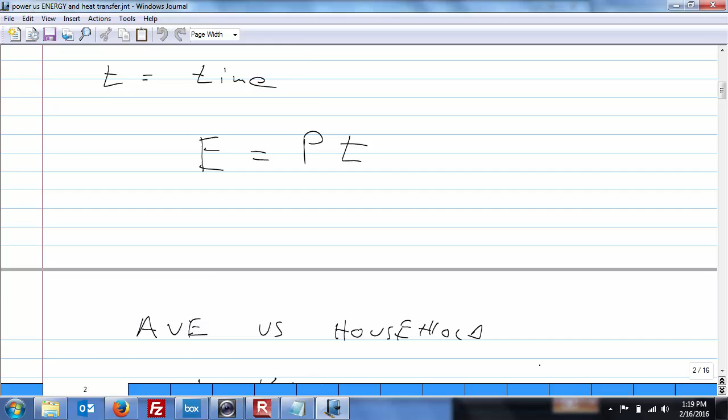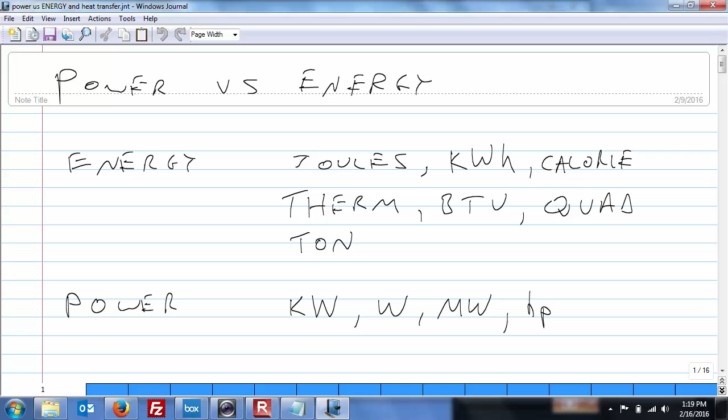Okay. So last time we covered the difference between power and energy. We talked about the different units that energy is measured in and the different units that power is measured in. This is your equation for the relationship between energy, time, and power. We did a little example problem. I showed you whenever you're doing an engineering technology problem, you're always solving 3 problems at once. You're taking care of the numbers, the powers of 10, as well as the units.

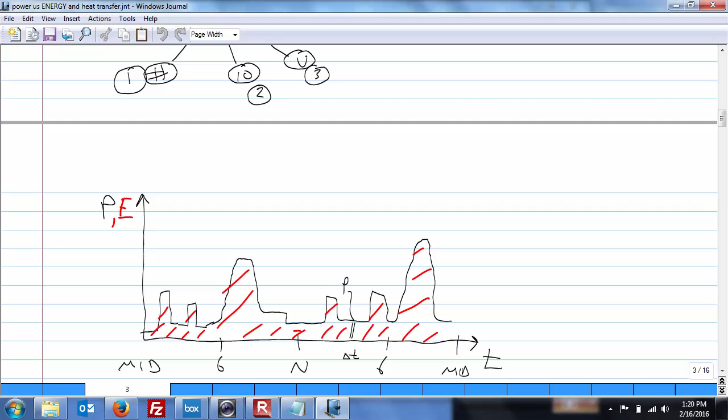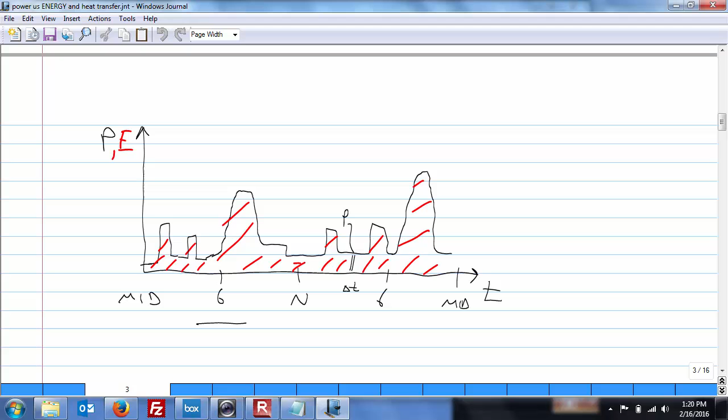We said that an average American house consumes about 1 kilowatt of electricity on a continuous basis, and that ends up being 24 kilowatt hours per day. I think we then converted that into dollars too, and said how much thermal energy is in your house at a given time. And I tried to give you a pretty good graphic on the relationship between power and energy, where the power is that little black curve, and energy is all the red stuff underneath. It's basically the integral under that curve, or the summation of all of that under the curve.

I showed you the 3 laws of thermodynamics, and basically what we're going to cover today is just another version of this first law, that you cannot create or destroy energy, and we're just going to do it from a thermal fluids standpoint. So we're going to dig down into one specific example of the conservation of energy. I also shared with you a really important concept. This is typically taught in sophomore year engineering courses, and it's how engineers are taught to think about power. I showed you that there's always an across variable and a through variable. You multiply the 2 together.

In the case of mechanical systems, the across variable is either force or torque. So whether you're pushing something or spinning something, the through variable is velocity or angular velocity, how fast it's moving through space or how fast it's spinning. For electrical circuits, the across variable, as you might imagine, is the voltage, and the through variable is current. Getting into fluids, we talked about power as being a function of how much pressure you have, which is a lot like voltage, and how quickly the mass is flowing through something. We'll see that in more detail in Bernoulli's equation, which I'm going to cover today. So this is just fluid power.

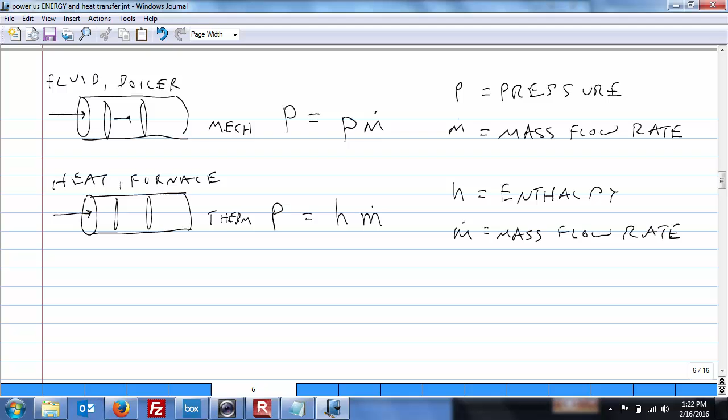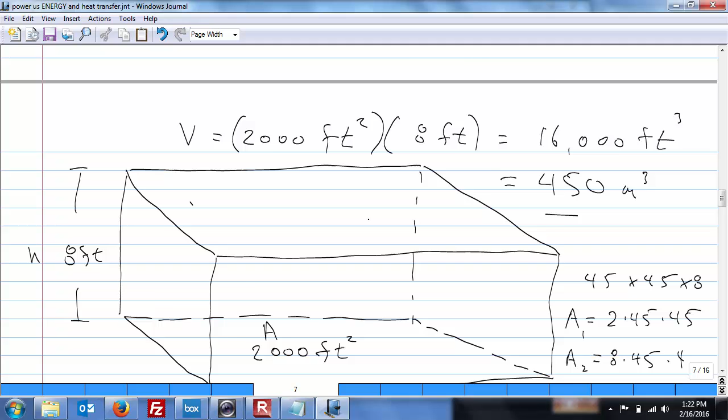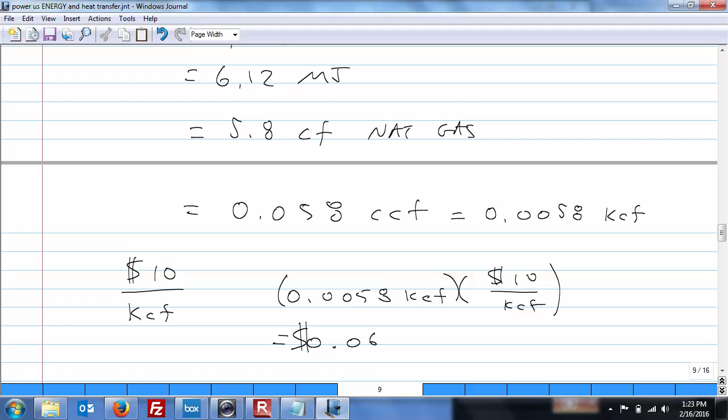Same thing if any of you are taking any of those heavy equipment courses. Same difference in your hydraulics. Right, so you just squish one place and the fluid comes out somewhere else. And then for a thermal system, we talked about enthalpy. So that's how much heat per unit mass is in your fluid, and then how quickly that fluid's flowing through there. So we're going to talk about that a little bit more today too. We did an example calculating how much thermal energy is in a house. I think we came up with 6 cents or so. We converted megajoules to cubic feet, cubic feet to 1,000 cubic feet, and came up with 6 cents of heat in your house.

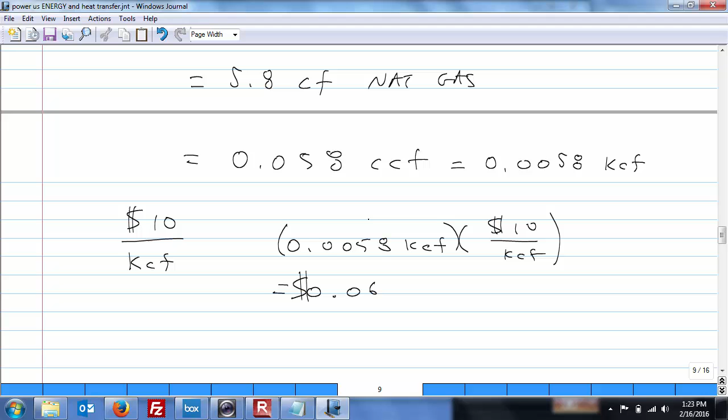We're also going to touch a little bit today on air changes per hour. Later in the course, when we do our blower door test, it's going to be critical that we determine how many times that air comes in and out of the house, or air changes per hour is another way to think of it. So if all of that hot air leaves your house every hour, you're paying 6 cents an hour. We also learned last week that it's not just convection. So for example, if I open the windows right now and let all the hot air in the room escape, that would be the heat convecting out of the room. We also learned that there's always conduction taking place as well as radiation. So this is just one chunk of that puzzle.

We talked a little bit about conduction, phonons. I love thinking about this, just molecules vibrating. And in fact, today we'll talk a little bit about the definition of temperature when we do fluids. Convection, that's just molecules moving, and then radiation, that's photon transfer.

Another thing on this, and this is critical for your building energy efficiency, is to realize that different materials are transparent to different wavelengths. In our everyday life, our eyes just respond to photons that have a wavelength between 400 and 700 nanometers. That's light. The electromagnetic spectrum doesn't end. There's stuff as long or as short as you want it.

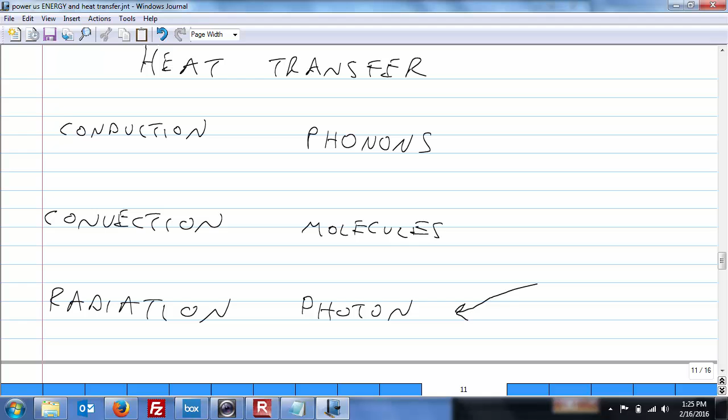In the case of windows, light photons come through the window, but the heat photons in the room typically don't go out. That's more or less the greenhouse. That's why greenhouses work the way they do. And it's also kind of our own greenhouse effect.

So that's radiation. We then went through a heat transfer coefficient, and I mentioned that this right here is just thermal power. It's also listed as Q. K is our heat transfer coefficient. A is the area. Delta T is the change in temperature.

If you remember last time, we spent a lot of time discussing the fact that a change in temperature in Kelvin is the same as a change in temperature in Celsius, because a Celsius degree and a Kelvin degree have the same size. The absolute scales are shifted by 273, but the delta T doesn't matter. And then S, this is how thick the wall is.

So we determined that if a material, do you guys remember what this is? Was that concrete, or might have been concrete? Yeah, it was either concrete or steel, but every material has its own K value. We also talked about the difference between the K value and the R value. The R value depends on how much you have, but the K value depends on what material you're talking about.

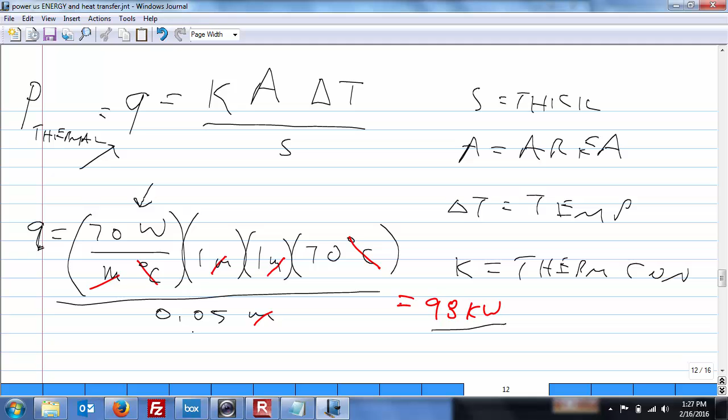Multiply the K value times the area by the delta T, look at how thick it is, and we determined that through that chunk of building, this is probably a boiler. The thing's probably pretty hot. Normally you don't have a 70-degree Celsius differential between indoors and outdoors. And 98 kilowatts of heat flowing through 1 meter squared, like out one window, is a lot. Way more than you get in a normal building. But the same mathematics applies.

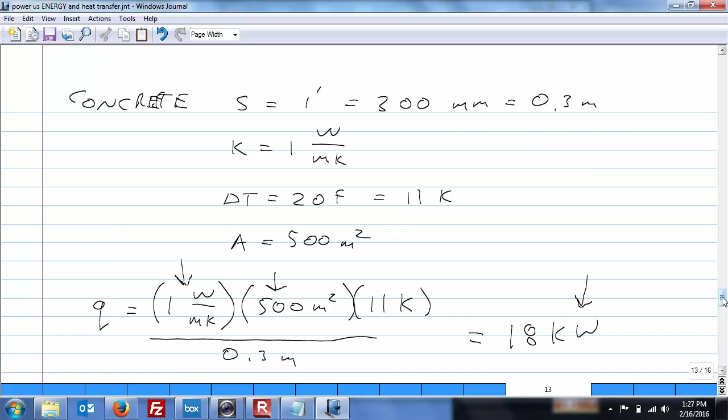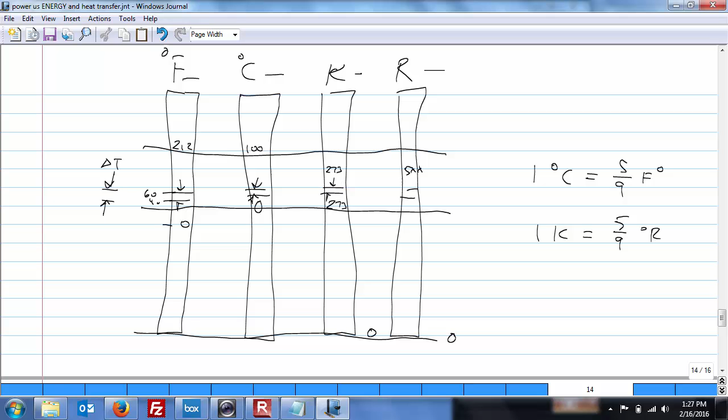So we did it again for concrete. That first one was steel, this was concrete, much lower thermal transfer coefficient, larger area, and therefore a smaller thermal loss. And there's where we looked at the relative scales of Fahrenheit, Celsius, Kelvin, and then Rankine. You don't hear that very frequently for temperature, but Rankine is the Fahrenheit equivalent to Kelvin. The degrees are just smaller.

Okay, then we went through enthalpy, which is just heat density. I mentioned the fact that little h is the intensive variable, so hopefully you took a little bit of time to look up the difference between an intensive and an extensive variable. Intensive is just how intense the energy is inside a given chunk of matter. So it's measured in kilojoules per kilogram, or energy per unit mass.

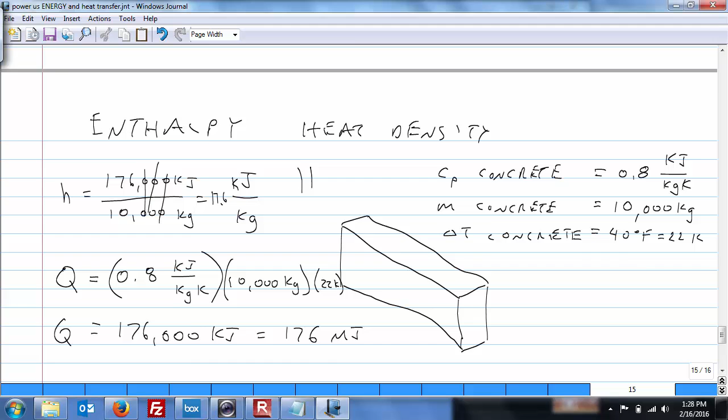And then big H is also enthalpy, but it's how much total energy. So it's probably worth writing this here, just off to the side. Big H, which is also enthalpy, equals little h times m. So again, little h is the intensive variable, mass is the extensive variable. How much do I have? Multiply the two together, and that's how much energy is in it.

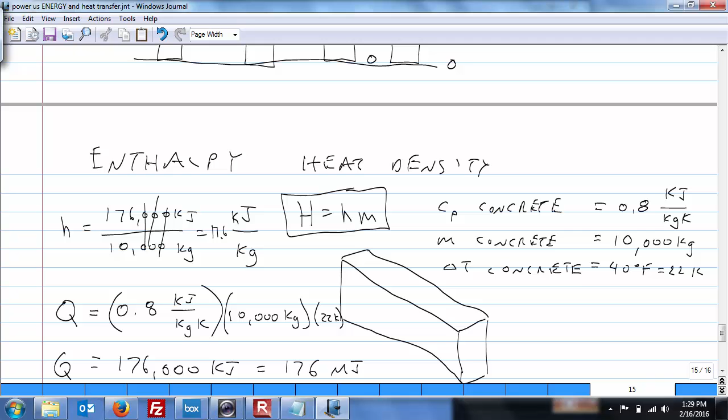And we did a little example with the Trombe wall. We said if we heat up a Trombe wall 22 Kelvin, how much energy is in that guy? I guess we came up in this case with 176 megajoules total. And in this case it's also worth noting, and I'll just write it like this, H equals Q. H is enthalpy. Q is also a variable that's typically used for thermal energy when I showed you the entropy calculation, so hopefully that makes things a little simpler.

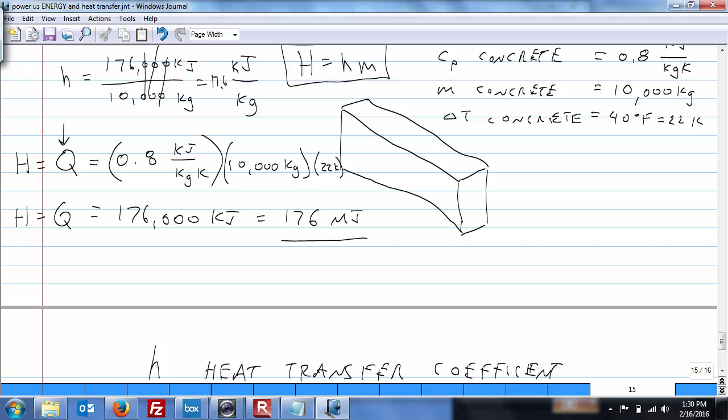All right, any questions on it? So that was physics and heat transfer we did last time. Today I just want to look at fluids. So, all right, let me pause the recording and we'll start a new one.